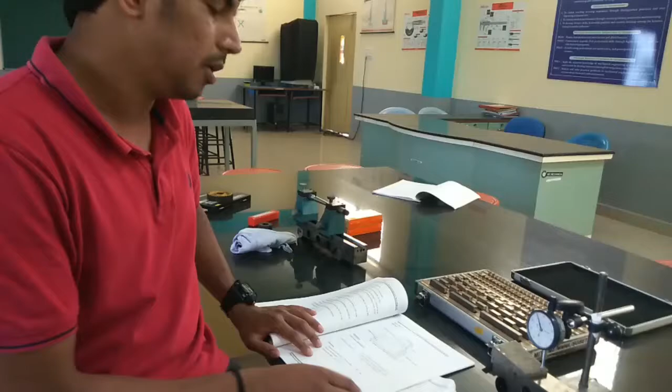This is called the sine bar. So first of all, what is meant by the sine bar? Sine bar is an instrument used for measuring the smaller taper angles.

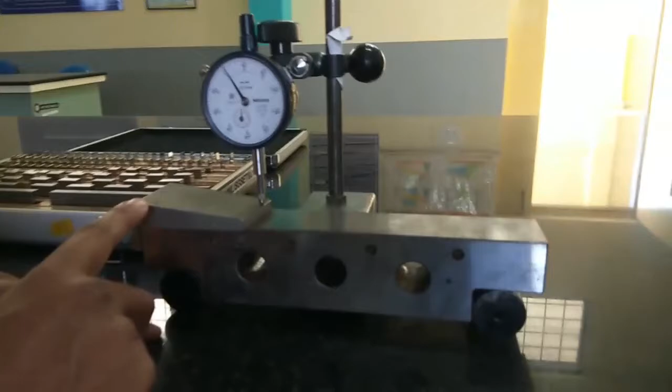This is the workpiece. In this workpiece we need to measure the smaller taper angle. This is the sine bar, and it consists of two equal size rollers. The distance between these two rollers is usually 100 to 200 millimeters. For this experimental setup, the distance between the two rollers is 200 millimeters.

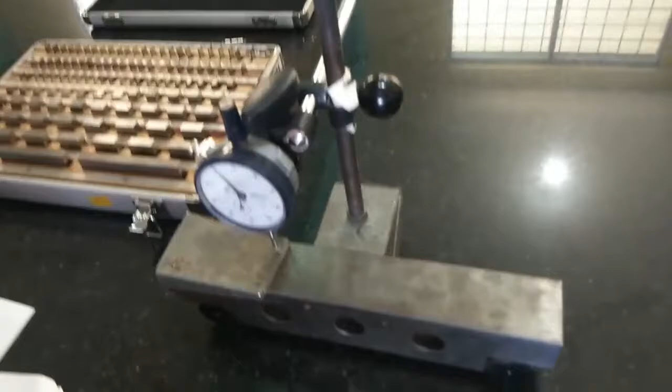In order to measure the angle, we have a formula: sin theta is equal to h by l. Before that, in this experiment we have an experimental setup, and in it we are using the dial gauge.

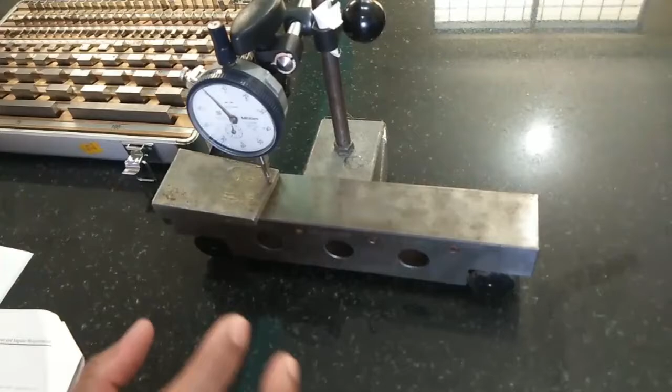The least count for this dial gauge is 0.01. This smaller reading is called the main scale reading, having values from 0 to 9, and it is also the larger vernier scale reading. This larger vernier scale reading you have to multiply with 0.01.

This experiment we are going to conduct with the help of a set of slip gauges. There are different types of slip gauges, called M47, M45, M87, and M112. Here we are going to use the M112 set of slip gauges, meaning we have a total of 112 different slip gauges.

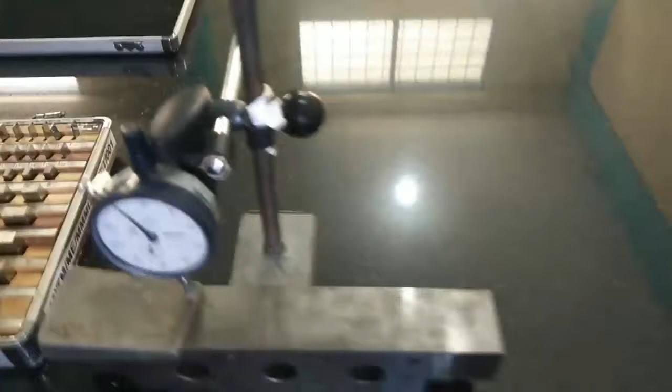These slip gauges have to be picked according to some procedure, and according to that procedure we have to use the minimum number of slip gauges.

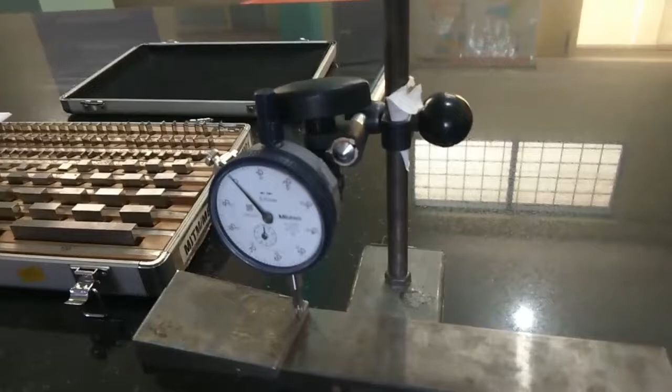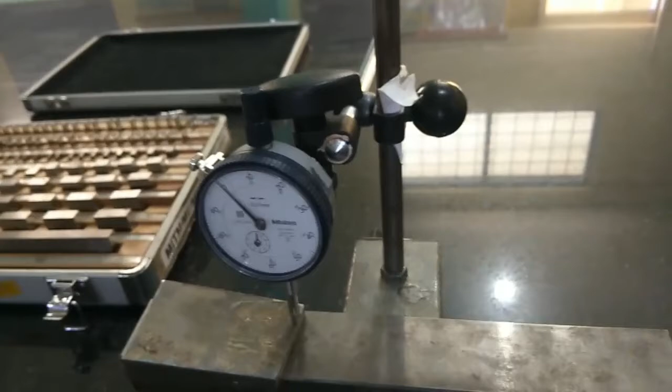We are initially setting the pointer of the dial gauge to one end of the workpiece, and making sure that the inner and outer dial gauge readings are at 0. Now we are moving from one end of the workpiece to the other end with the pointer of the dial gauge, and we note down how much is the deviation.

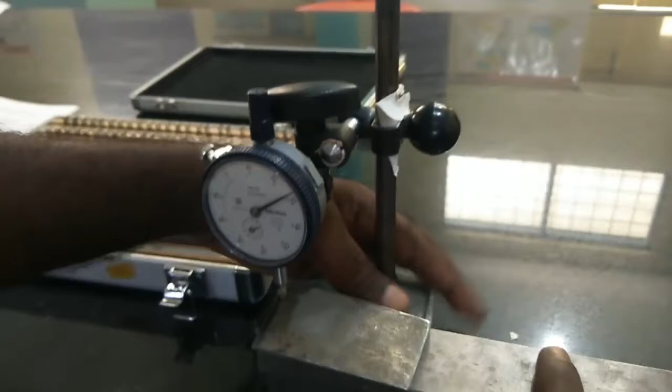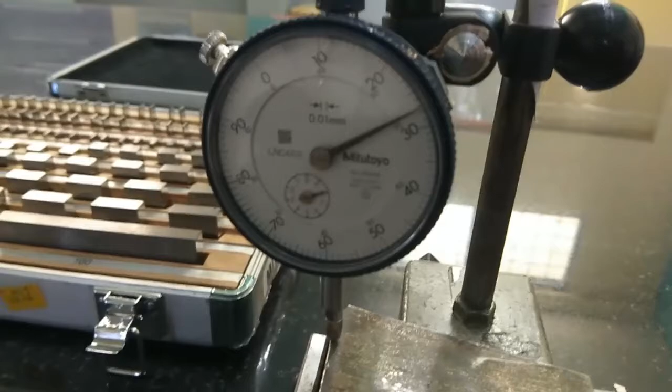So whenever moving from one end to the other end of the workpiece, we need to note down the deviation. Initially, the inner circle reading shows 0.8, that is called 8, and the outer dial gauge reading shows 28.

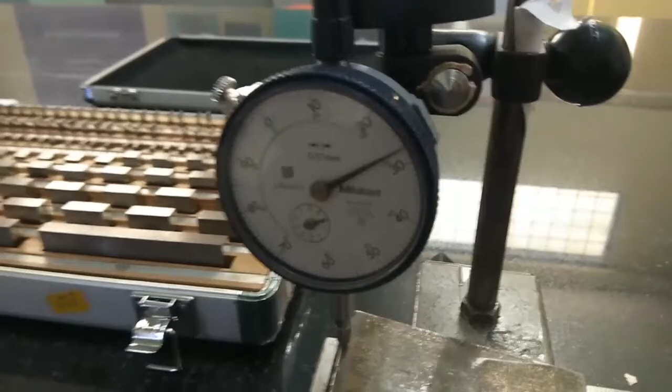28 is multiplied with the least count 0.01, then it becomes 0.28. So the total reading, 8 plus 0.28, is called 8.28. Next, this is called the M112 set of slip gauge table.

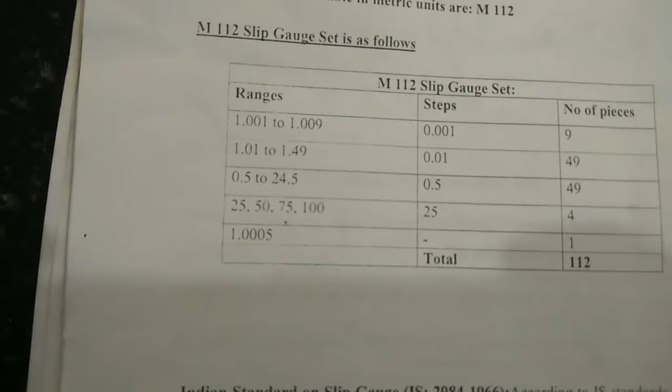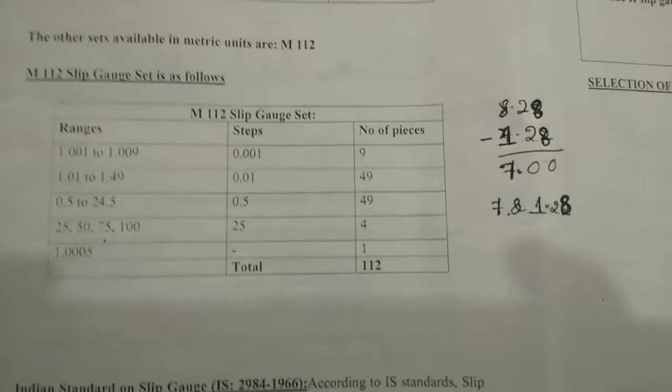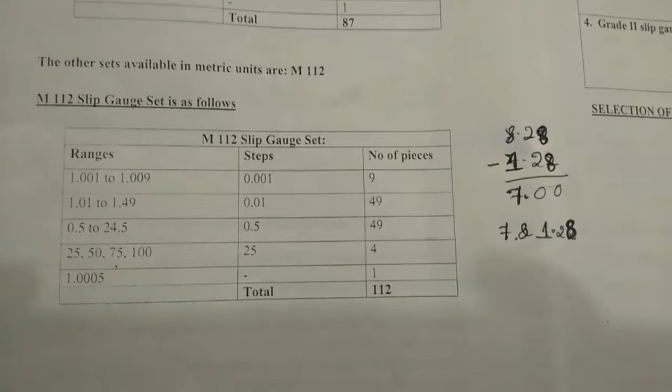Here we are having the set of slip gauges combination, and these are the practical slip gauges available in our experiment. First, according to 8.28, we have to minus 1.28. In the second row we observe 1.01 to 1.49, meaning the 1.28 slip gauge is available. Whenever 8.28 minus 1.28, we are getting 7.

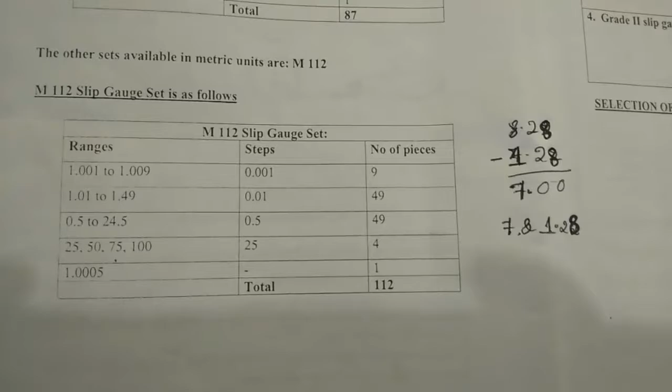Next, 0.5 is observed in the third row, we are having 0.5 to 24.5 slip gauges, meaning the 7 slip gauge is also available. So the required combination now we are taking to match with 8.28, that is 7 and 1.28.

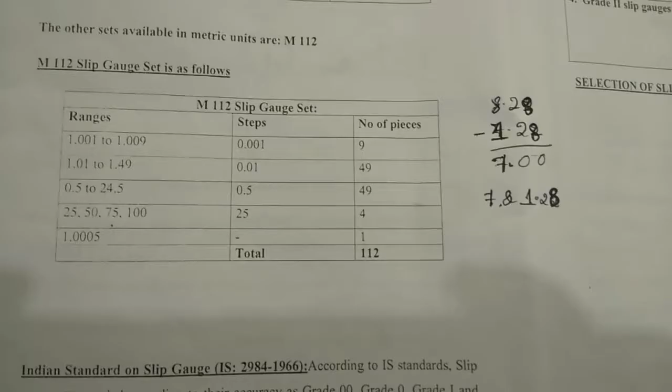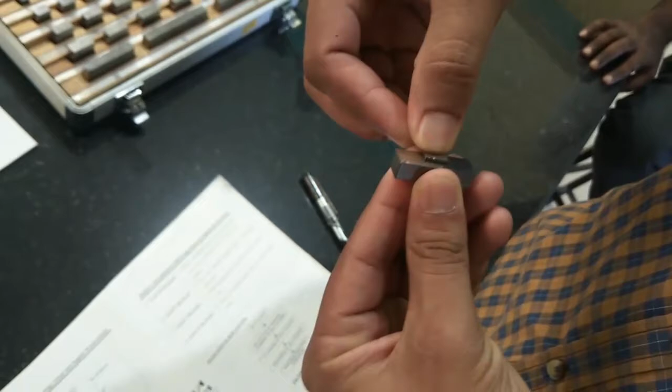Now we are picking the 7 and 1.28 from the slip gauge combination, and joining them according to the slip gauge ringing phenomena. The slip gauge ringing phenomena means we have to rub them together and join them without having any air particles in between.

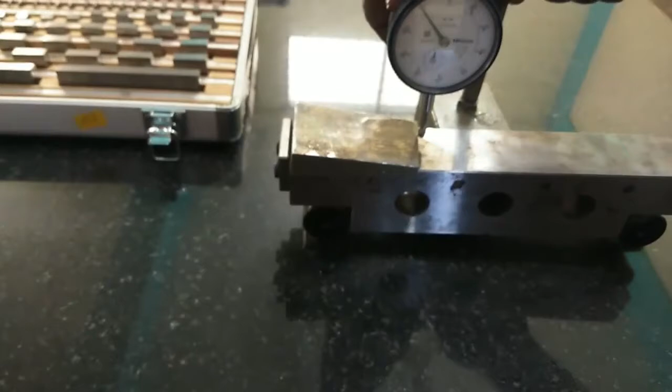Now we are placing the 8.28 combination of slip gauges below the roller, and again moving the dial gauge from one end to the other end of the workpiece, and again noting down the deviation.

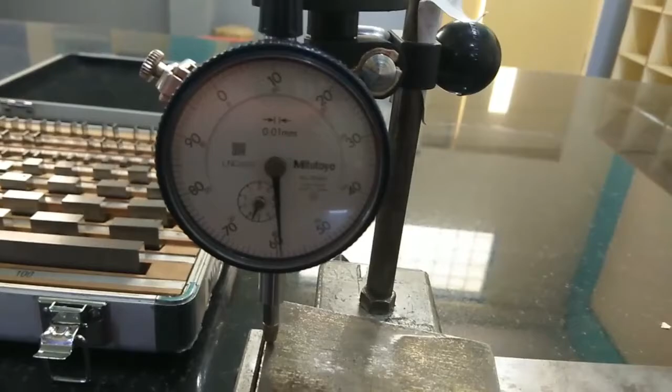Now observe, the inner scale reading shows 4, between 4 and 5, and the outer reading shows 58. That 58, multiplied with 0.01, is 0.58, and 4 plus 0.58 equals 4.58.

This 4.58 deviation is added with the earlier deviation of 8.28, so now it becomes the total deviation, 12.86.

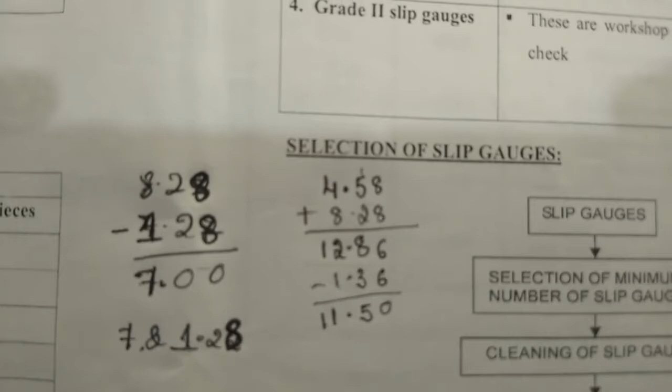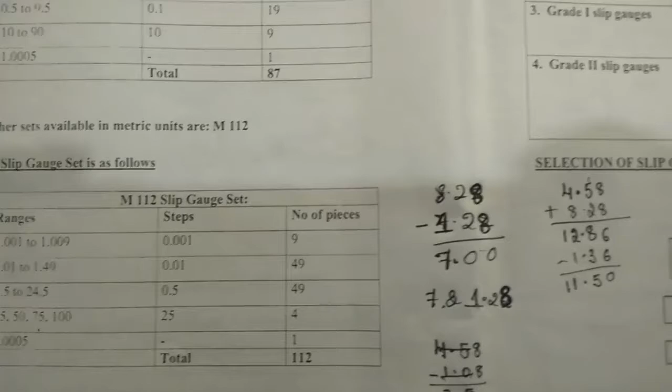The 12.86 is again taken for the slip gauge combination. Here in the table we have 1.36, so minus 1.36 we are getting 11.5, meaning the 11.5 slip gauge is also available.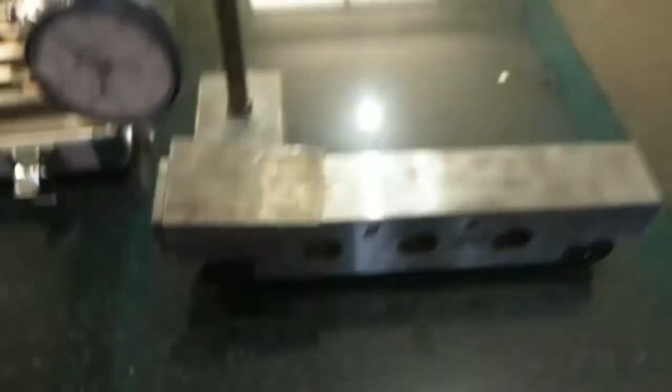Now we take two combinations again and repeat the process until whenever we move the dial gauge from one end to the other end, it has to show 0 reading. This is called the procedure for solving the angular measurement.

Similarly, we repeat the process until the dial gauge, moving from one end to the other end of the workpiece, shows 0 reading. This is the number of trials we have taken, and the final H value we got from the slip gauge combination is 8.09.

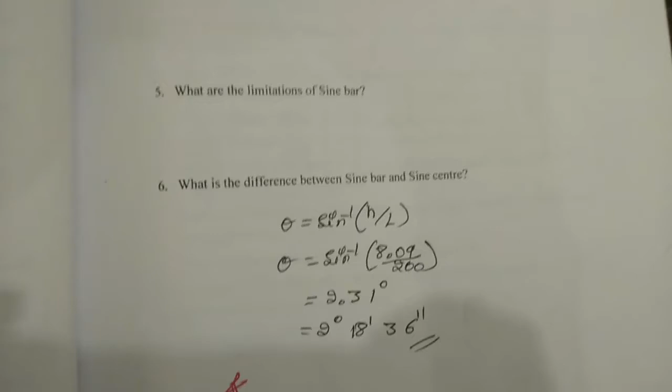Here the formula used to find the angle is theta equals sine inverse of H by L. H is the height of the slip gauges and L is the distance between the two rollers, and L is constant, equal to 200 millimeters. Substituting the values in the formula, the angle we got is 2 degrees, 18 minutes, and 36 seconds.